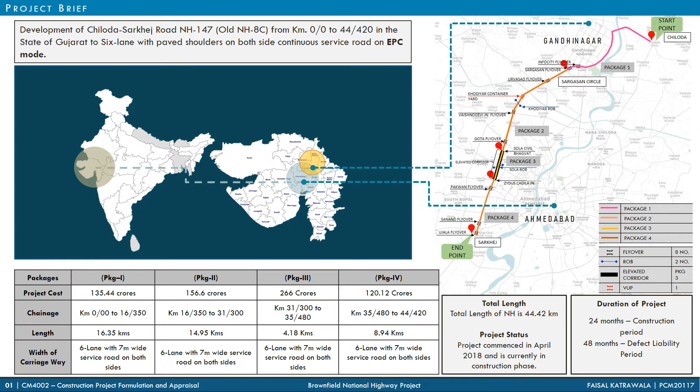For the alignment analysis, two alternatives and one proposed alignment were chosen and a weighted scoring model was done considering 5 parameters and 12 subparameters. The 5 parameters considered were environmental impact, connectivity, scope for urbanization, construction cost, and road user comfort and safety.

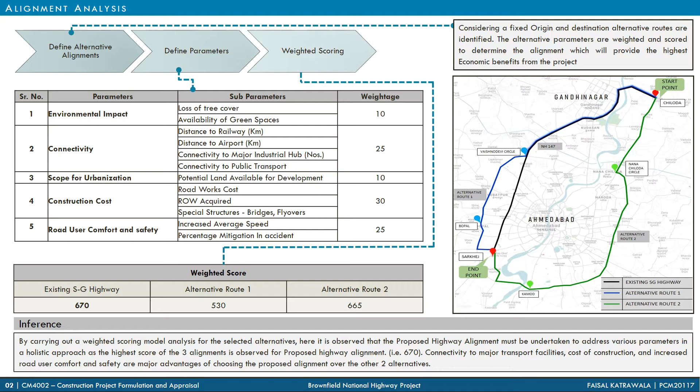After carrying out the weighted scoring model, it is observed that the proposed alignment has the highest score of 670. Connectivity to public transport, cost, and increased road user comfort and safety are the defining parameters that make the proposed alignment a better alternative.

The design problem is identified after consultation with client, contractor, and designer. The client prepares a client's brief on the basis of which the designer's brief and contractor's brief are prepared. On the basis of briefs, individual parameters, each for client, contractor, and designer, are noted down, after which the client, contractor, and the designer sit together to identify the common parameters and define the parameters that are a must and the parameters that are wanted.

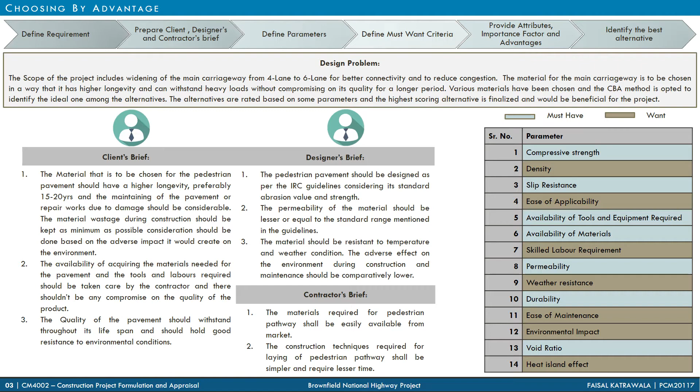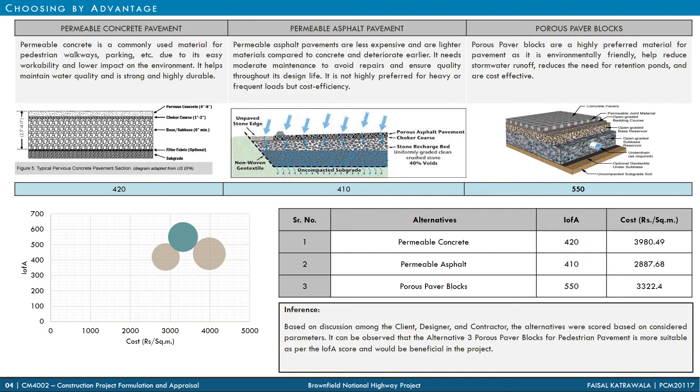After the selection of parameters, three porous pedestrian pavement alternatives are identified, that is, permeable concrete pavement, permeable asphalt pavement, and porous paver blocks. Each parameter is given an importance factor, and based on the attributes for each parameter, for all the three alternatives, a scoring is carried out. The scoring for porous paver block comes out to be the highest. Based on the costing and the importance factor score, the porous paver blocks come as the best alternative.

The techno-economic analysis is carried out to determine the economic benefits to carry out the project. The techno-economic analysis is carried out on the basis of vehicle operating costs and accident costs. For both the factors, costs are carried out as per IRC SP 30/2009 for with development and without development, the difference of which gives the savings.

A present worth factor of 7.5% is considered and the economic costs are projected till the design life of highway, that is till 2034. As seen in the first graph, the techno-economic cost decreases after the development of NH147 but gradually increases over the years due to increased traffic volume and congestion. It is also reflected in the second graph with the savings going negative after a few years.

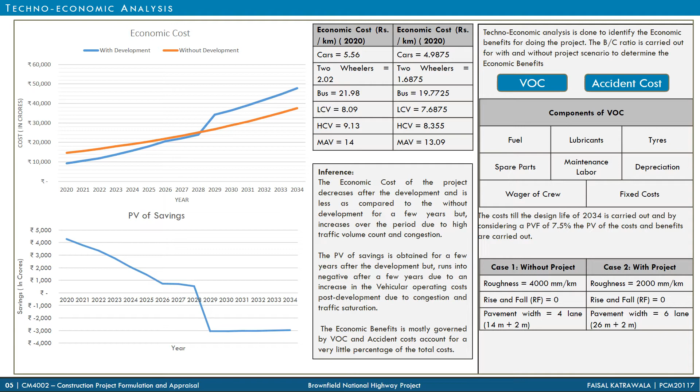The traffic volume along the stretch of NH147 is highest for a 4-lane national highway in Gujarat. Due to high traffic volume count exceeding well beyond the design capacity, the techno-economic analysis is also carried out at design capacity. The benefit to cost ratio comes out to be 0.34 at design capacity, which makes the project infeasible, and comes out to be 2.45 in current scenario, which is a bit optimistic.

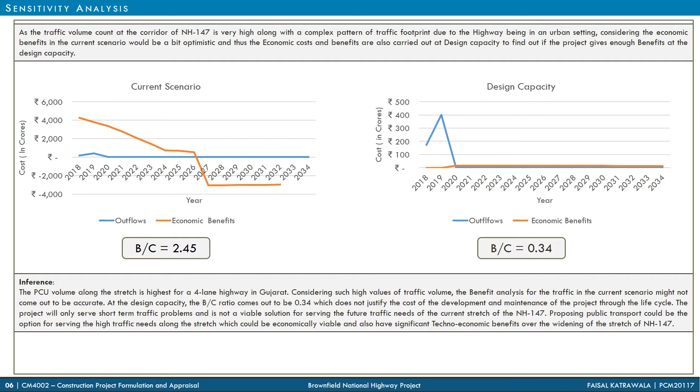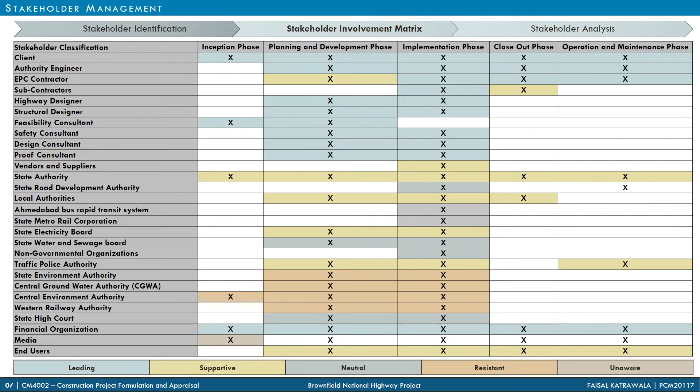The first step of stakeholder management includes stakeholder identification. The stakeholder register is created based on project charter and procurement documents. After stakeholder identification, stakeholder involvement matrix is created and stakeholder analysis is done. In the stakeholder involvement matrix, the involvement of each stakeholder is identified phase-wise and from leading to unaware. Most of the stakeholders are either leading or supportive. The state and the central level environmental and groundwater authorities are resistant but can be managed by following proper guidelines and documentation.

Stakeholder analysis refers to assessing or analyzing the involvement of stakeholders based on their control, concern, interest, and impact they would generate over the project, and a relationship matrix is created accordingly. Power here refers to the level of authority they hold over the project, and interest refers to the level of concern. Based on the level of authority and interest of stakeholders, a matrix is created. The stakeholders with high interest and power need to be managed closely, and those with low power and interest need to be kept satisfied.

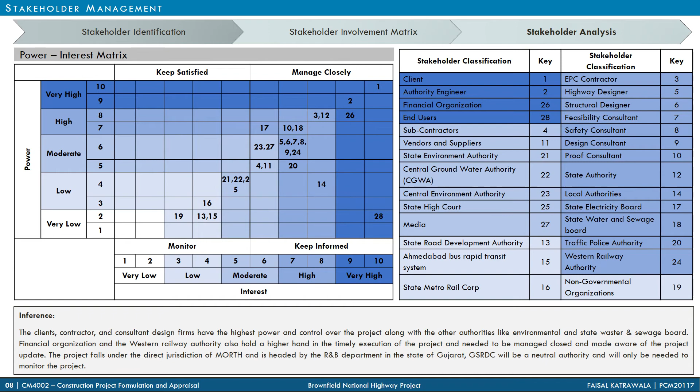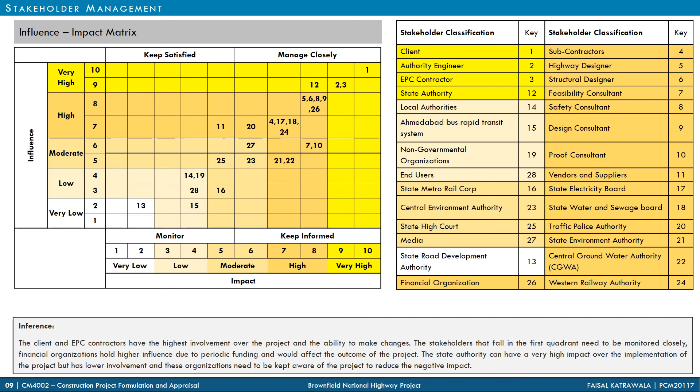The alignment analysis is done considering a fixed origin and destination based on which two alternatives are considered apart from the proposed one. The weighted scoring model for the proposed alignment comes out to be the highest, which makes it the best alternative for the development. From the techno-economic analysis, it can be concluded that the high benefit to cost ratio of 2.45 is a bit optimistic due to the high traffic volume along the corridor. The project is economically viable for the traffic volume at design capacity.

From the stakeholder management, it can be concluded that the majority of stakeholders identified in the project are either governmental bodies or statutory organizations that are either supportive or leading the project. The central and the state level environmental authorities and the groundwater authorities are resistant due to the cutting of trees and the use of groundwater, but can be managed. Choosing by advantage is a more effective method of choosing best among alternatives with respect to the weighted scoring model. For the design problem of pedestrian pavement alternative, porous paver blocks come out to be the best alternative.